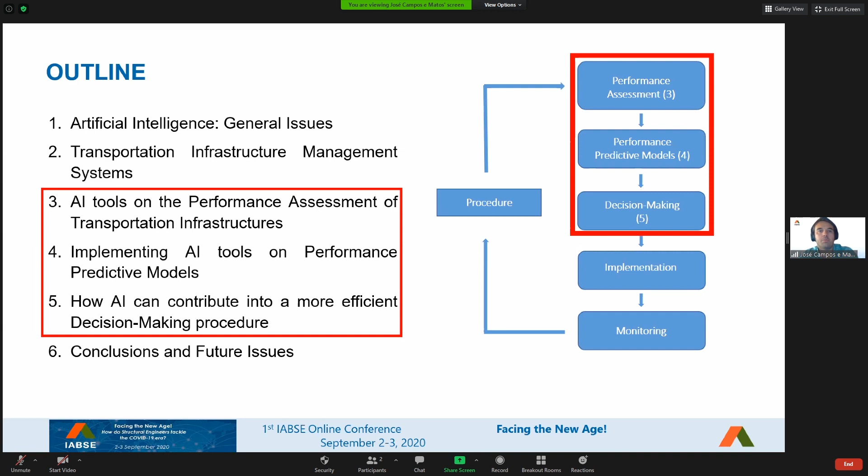And these stages cover the performance assessment, the performance predictive models, and the decision making, which are the main stages of any transportation management system, infrastructure management system. At the end, I'm going to speak about the main conclusions and future issues about this application of artificial intelligence tools on transportation infrastructure management systems.

So, what is artificial intelligence? Artificial intelligence is defined as the ability of a digital computer or a computer-controlled robot to perform tasks associated with intelligent beings. The term is often applied to the project of developing systems endowed with the intellectual processes characteristic of humans, such as the ability to reason, to discover meaning, generalize, or learn from past experience.

And what tools do we have for artificial intelligence? We can split the artificial intelligence tools into 6 main topics. The first one are tools used for search and optimization. The second one for logic issues. The third, probabilistic methods for uncertain reasoning, closely related with probability and the use of artificial intelligence to get a more accurate definition and less uncertainty.

The fourth, classifiers and statistical learning methods. The fifth, which is the most used one, is artificial neural networks. And the sixth is related with evaluating progress. And these are the tools that we have in our hands. I'm not applying all of them in transportation infrastructure management systems, but I'm giving you later on some applications of some of them in these infrastructure management systems.

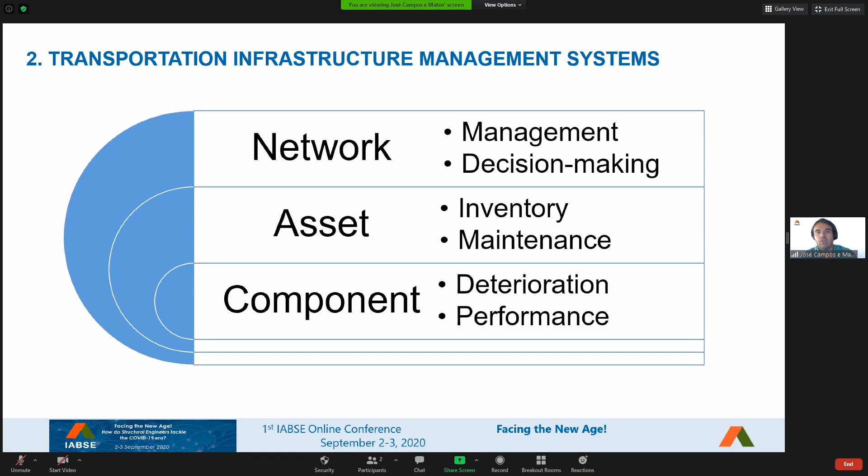Then we have the asset or the system, depending on the terminology. And here we do the maintenance typically at the system level and/or the asset level. And also the inventory is made at asset level. But the fact is that the decision making and the management itself is made at a network level. So there should be a high connection between the component, the asset and the network level for transportation management systems. And what we see nowadays is that most of our transportation management systems cover the component and the asset. They do not connect with the network level.

So going again, I spoke about this component, asset, and network. And what are the main stages of a management system, or what should be, because most of them do not have these stages. So this is what we should include in a management system. We should include the deterioration of the component.

And for that, we need to get data, and typically the management systems nowadays get this data. Most of them are condition-based management systems, so they only get visual inspection data on the condition of the component. But more recently, some are going deeper, and they get other kinds of data from NDTs, and they mix this data with condition and visual inspection data and so on. But this is the data about the deterioration of a component.

Then we need to calculate the performance, and we need to predict the performance. And not all management systems predict the performance, or have models for doing performance prediction. Most of them only focus on the database, on what I said before, on the deterioration level.

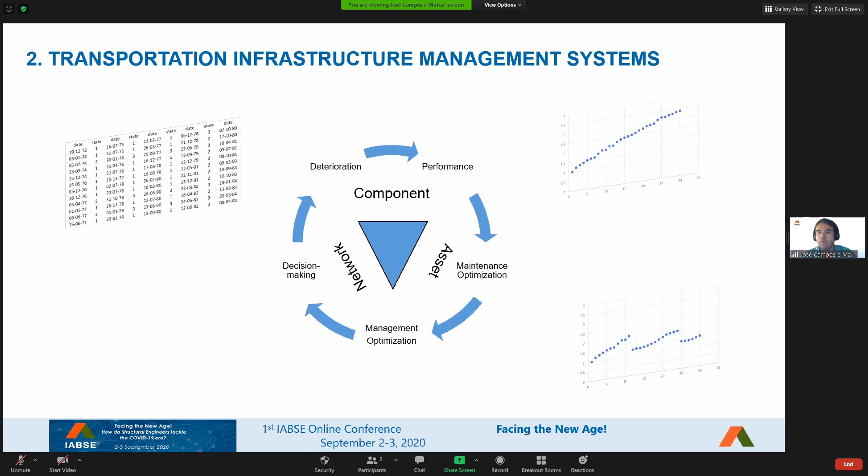After we predict, which is already good for those systems that already have some predictive models, we need to do optimization. We need to simulate different maintenance strategies, and then we need to implement an optimization algorithm to define what is the best strategy from those possible strategies that we have. So we do optimization, and at the end, we can do decision making.

I want to say here that the algorithm or the software does not replace humans. No one replaces humans. So the decision making should always be made at the end by humans. But what we want here is that future infrastructure management systems should support humans in their decision making process. And typically we start from a component, then we go to the asset, and then we finalize at the network level.

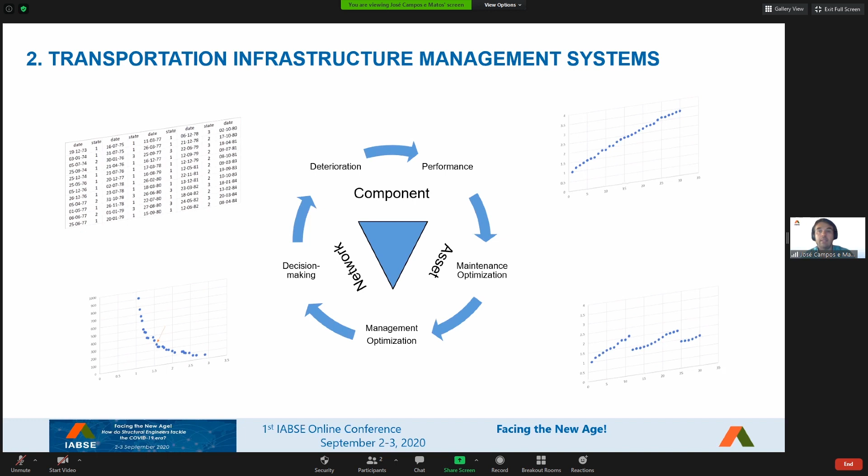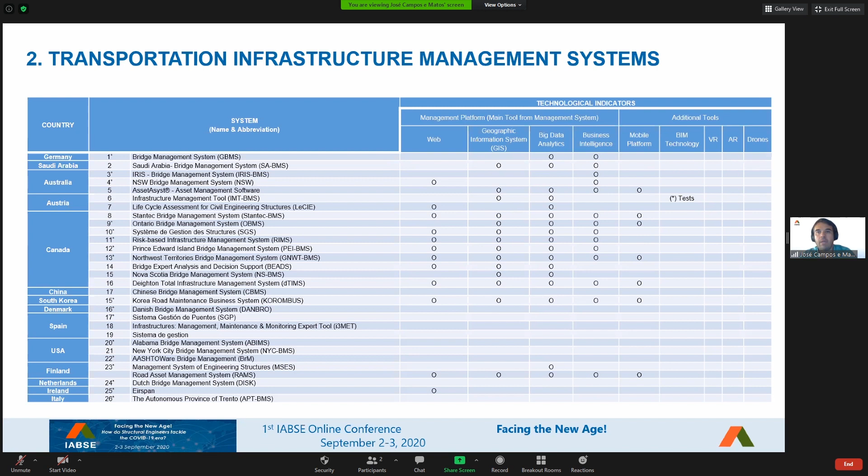So BIM, some are using, but only some. And virtual reality, augmented reality, almost none is using. And if we speak about drones, I know that we are applying drones also, but it's not completely connected with the management system itself. So this is the status of the other management systems, as you can see here.

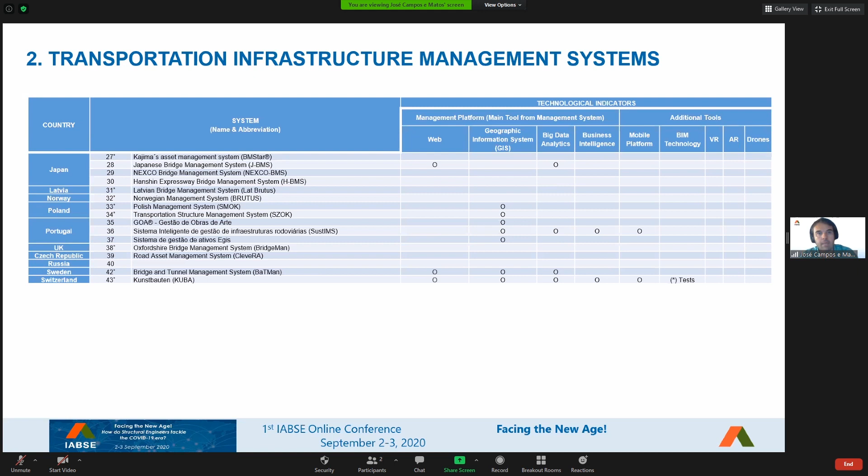And this is a very good comparison in terms of technological advancement of the management systems nowadays for transportation infrastructures. So at the end, what we can say is that there are already advancements in the management systems, but there is still a lot to do.

Now, as I told in the outline, I'm going to split my presentation in the 3 main stages of an infrastructure transportation management system. The first one is the application of AI tools on performance assessment of such transportation infrastructures. And when we assess, we can do it with visual inspection. We can use NDTs, or even we can use monitoring. So how the AI tools can be used in order to make a more efficient assessment.

And I'm going to provide you some examples from our research projects and from our developments that we have here at the University of Minho. And one of these examples is this bridge. This bridge was assessed through a reliability analysis. The reliability indicators are not often used. In some countries, they are using reliability analysis, but mostly it is only condition based, and at component level. So the reliability is made at the asset level.

So you can see here the model of the whole bridge, and it's an indicator that is not so easy to get, because you need to use numerical modeling to obtain such indicator. But it's a very important and more objective indicator than the condition one. And what we did here, we started to use Bayesian inference as an AI tool first to reduce the statistical uncertainty of our parameters, and then we combined another AI tool, an evolutionary algorithm, in order to identify the most relevant parameters of this bridge, and compare this with threshold values in order to check if the reliability that we are calculating at the end is or not within the threshold value.

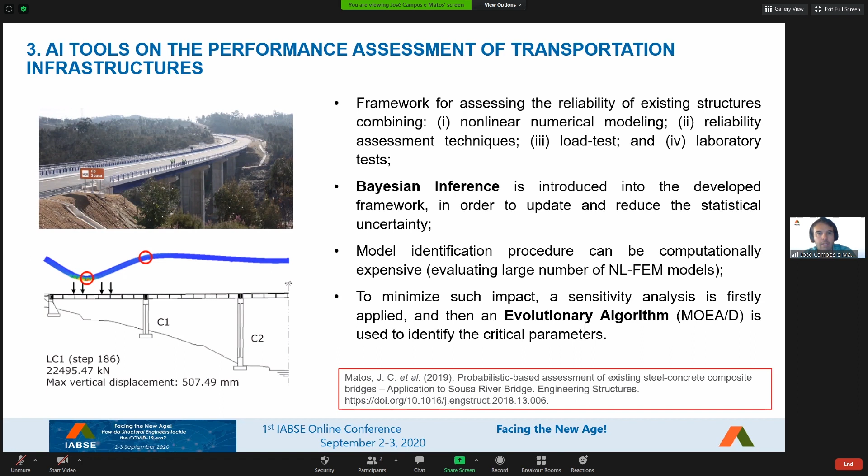So this is one simple application of an assessment of a bridge. It's not so simple, but it's an application where the AI tools were used to reduce uncertainty first, and then to calculate the reliability indicator of that bridge. So you have here the publication where all the study was provided, if you want to go and search a bit more about this application.

A second application, which is also quite interesting, is about the use of emulation models. In this case it was surrogate models, a Gaussian process response surface technique. And this is mainly because we have very complex systems and very complex structures. And when we do the assessment of bridges or any other kind of structure, typically the models that we have are very, very heavy. And one way to use AI tools to make these models lighter, and this way to do the analysis in a more efficient way, is to use surrogate models.

This is being used more often, and this is the case of an application to a masonry arch bridge, a whole bridge that was assessed. We determined also the reliability indicator of such bridge, and we did a probabilistic-based assessment of this bridge. And we used first very heavy models, and then we calculated the surrogate model to give a faster and more efficient response, and in this way to determine the reliability indicator again of this bridge.

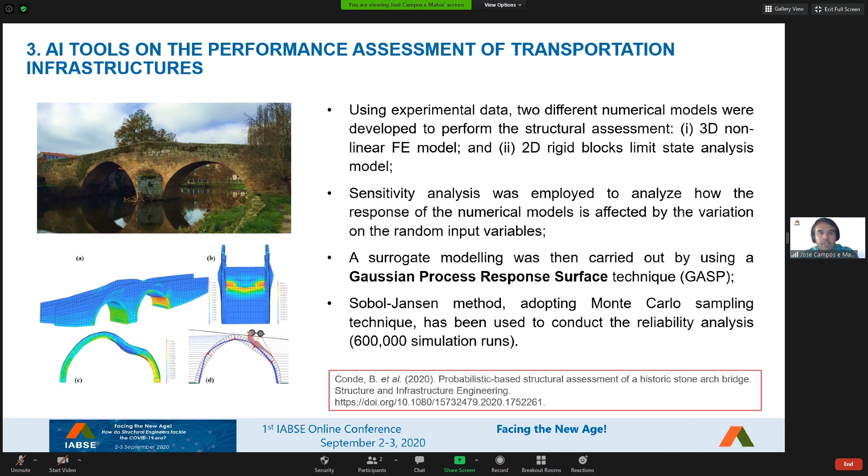Another application is with the classification system that was developed in this case for rock slopes, so in geotechnics, in embankments. And we applied artificial neural networks and support vector machines to support the classification and the routine inspection activities of our engineers. And we defined in our research group an earthwork hazard category.

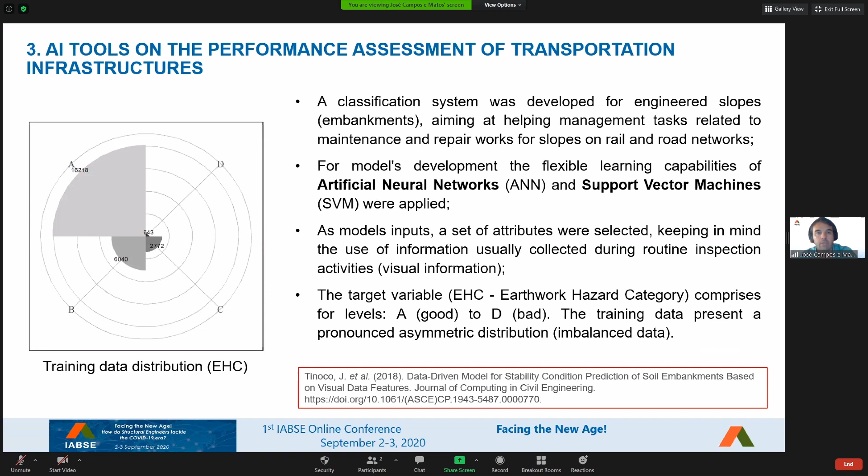So as you know, rock slopes are present a lot in transportation systems, railways or roads, and there was no classification here in Portugal for rock slopes, and we started with this classification, and then we did the training data. But the fact is that in the data that we had, most of these slopes were in a very good state. So you can see an unbalanced distribution of that data. And due to that reason, we were somehow obliged to use artificial intelligence tools to simulate the two possibilities and check how we fit the final data that we have, so that we could train and we could see what is the response.

For any kind of new slope that we have, we can use these tools in order to determine the prediction of this factor, the EHC factor. So we split the data set in two strategies, one for regression and one classification strategy. And then, because of the imbalance that we saw before, we have too many classifications as A in the data set. We use some approaches like no resampling, SMOTE, or oversampling.

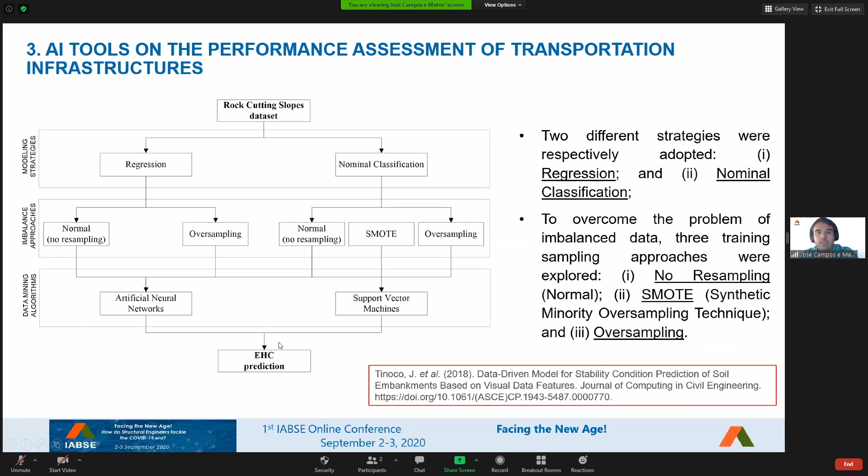And then we use artificial intelligence tools, in this case data mining, ANN, and support vector machines to do the prediction. These are some of the results that we got. As you can see here, the metrics that we use show that, especially for good shape slopes, which are the ones with more results because of the imbalance, we have more A and B. For these A and B we have very good results. But even for the others, we have very good results.

And if we use what we define as the best model for predicting the classification and assessment of our slopes, an artificial neural network model predicting the EHC classification factor from A, B, C, D, following a nominal classification strategy and applying an oversampling approach, the outcome gives us a very good distribution in terms of frequency compared with reality. So again, we could use AI tools on a large number of rock slopes, in roads or railways, to support us in the assessment and classification of such slopes.

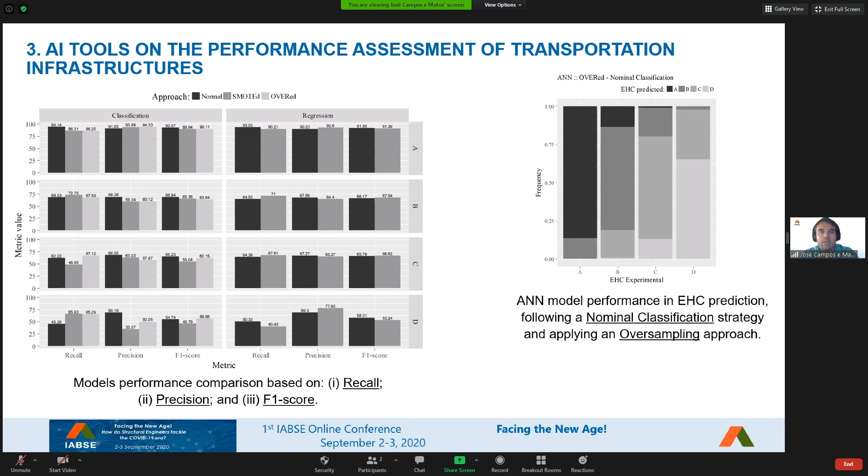Now I'm going to the second stage of a transportation infrastructure management system and how AI tools can be applied to develop and implement what we call performance predictive models. Performance predictive models are models that, based on the data sets that we have, we can use to predict and forecast. And here I give you an example of the application of performance predictive models with pavements.

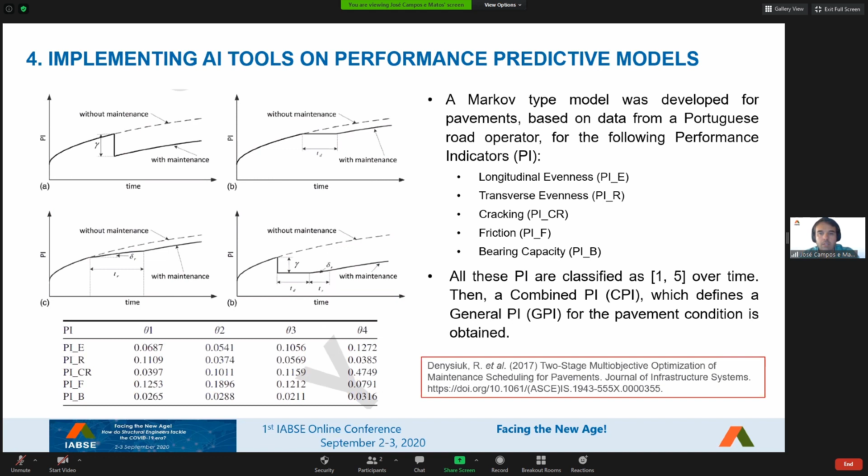In this case, we implement a Markov type model, with a Markov matrix that gives us the transition probabilities to develop the forecasting for these indicators, which are the main indicators for the pavements. And once we get these indicators classified from 1 to 5 over time, we make a combined performance indicator that gives us the condition of our pavements. You can see this study in this publication.

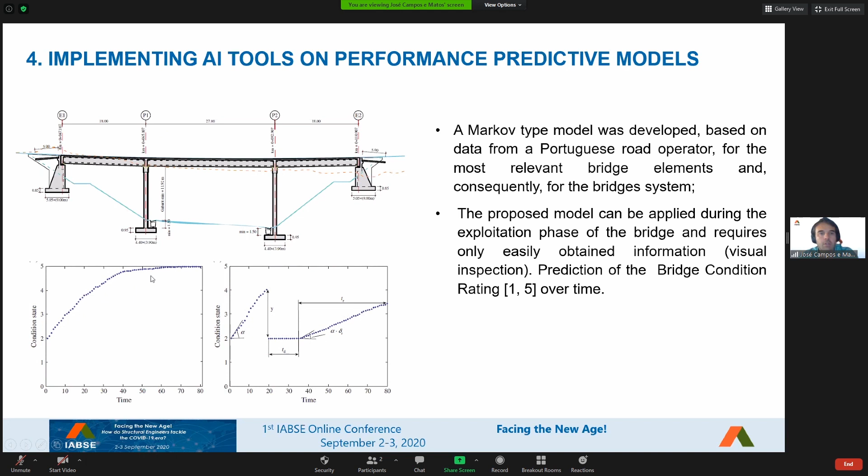The other one is a bridge that was also analyzed, and we developed a Markov type model of this bridge, which again gives us the forecasting and classification, in this case for different components of the bridge. This way it was possible to predict the evolution of the condition state of the bridge over time. And we could also simulate different maintenance or repair strategies on this same evolution curve. So this is the prediction model for the bridge, such as we have for the pavements. This is a publication in the journal of IABSE, so you can go there and see a deeper analysis.

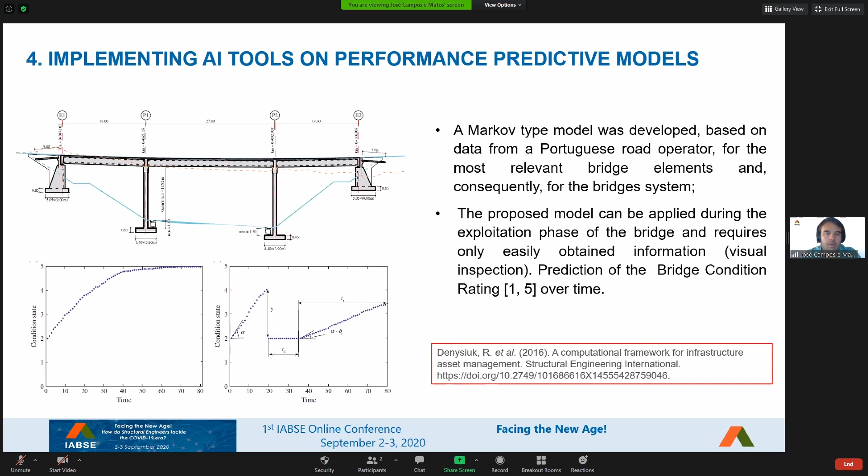But we did some more recent studies, and for bridges, in this case, we used a data set from the NBI, and we compared the Markov type models that we developed before with other kinds of models. As you can see here, we compare the Markov models with the semi and hidden Markov, but also with artificial neural networks, which is an artificial intelligence model. And the artificial neural network is the one that gives the most accuracy, because the ratio between the predicted and observed values is very close to 1. So AI tools may in the future replace the Markov models most widely used in transportation management systems.

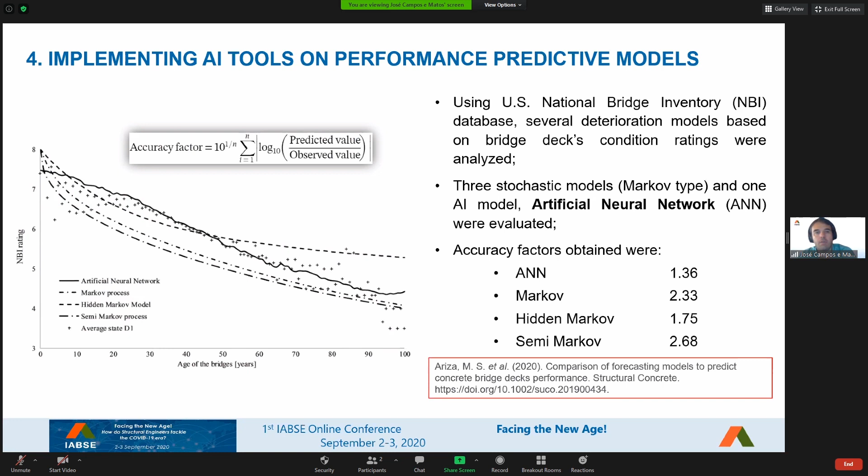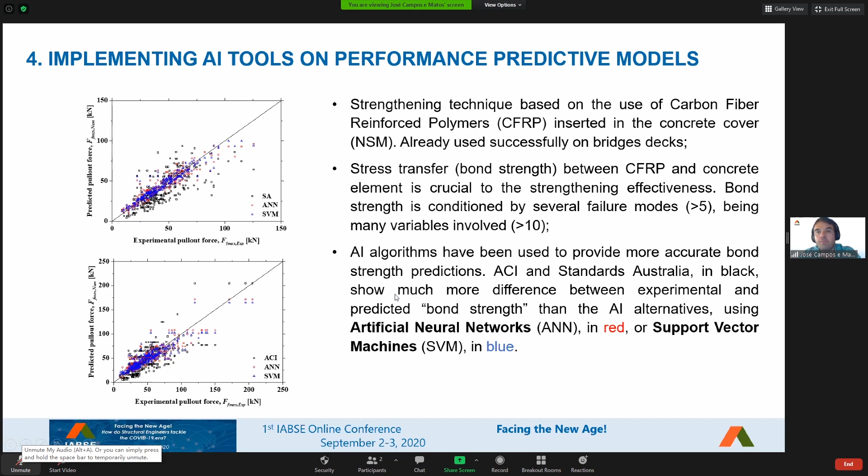So in fact, we should think of using more and more AI tools, such as artificial neural networks, to predict the evolution of the performance of our bridges. And the good thing is that ANN works not only with less data, but also with a lot of data. So we can train it; it's a dynamic process. So my conclusion from this study is that artificial intelligence could and should be a very good tool to implement in the future for the performance prediction of our assets in transportation infrastructure management systems. Here you also have an example of applying artificial intelligence tools to predict the behavior over time of the pull-out forces in strengthening and repairing concrete bridge decks.

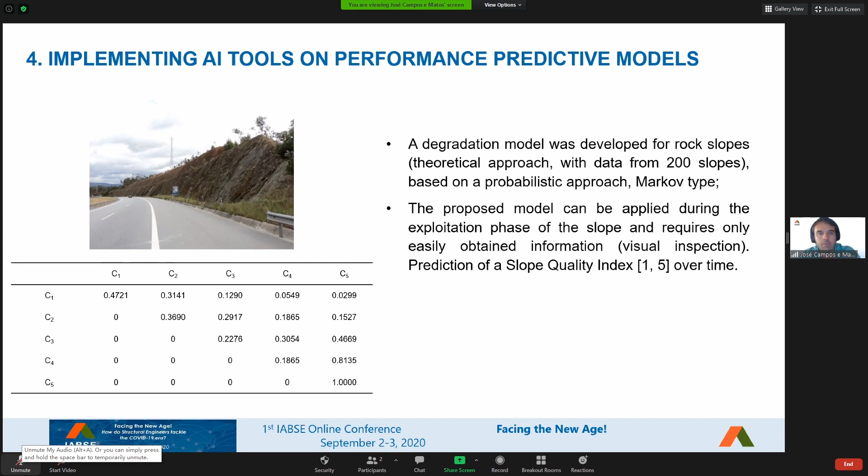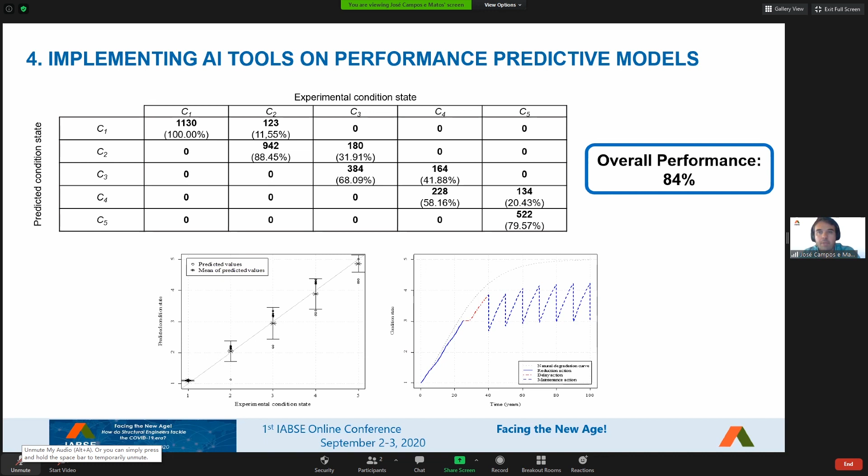And also here you can see an application of using Markov type models in order to predict the behavior of rock slopes with the time. So here is the accuracy, the performance of the model, and here is the prediction of our model. The accuracy is more than 80%, which is very good in this case, and I fully recommend.

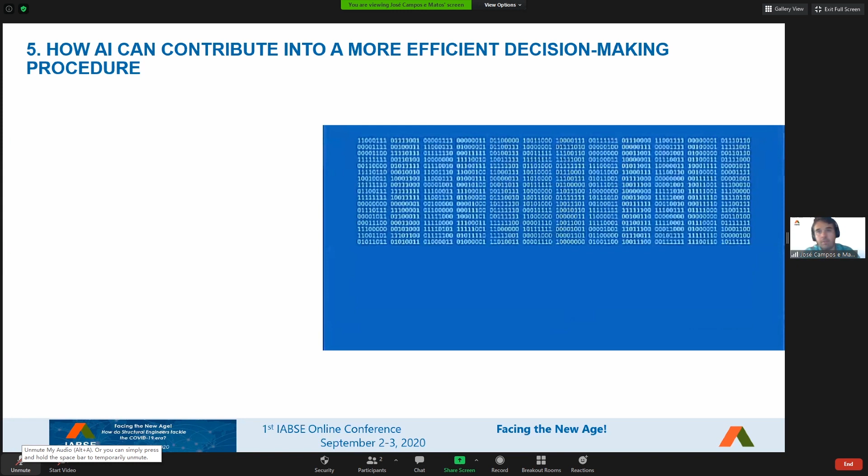The last part of my talk is concerning the application of AI tools in the decision-making procedure. So once we have the data set, once we have the prediction, then we need to do optimization, multi-criteria optimization. In this case, it is made for pavements. We developed a Pareto curve, and we use an evolutionary algorithm, a global optimization algorithm, which is an artificial intelligence tool to get the most reasonable set of solutions.

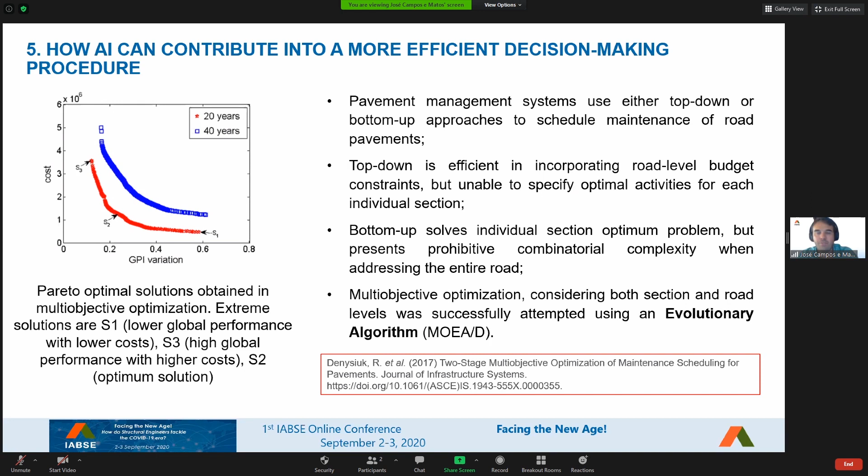And from this solution, then we can support the owners making their final decision about what is the best maintenance strategy. Any more information you can get in this publication, as well as all others. This is the same, but for concrete bridges with different strategies for 20 and 30 years. And we apply an artificial intelligence tool in this case for getting the best results.

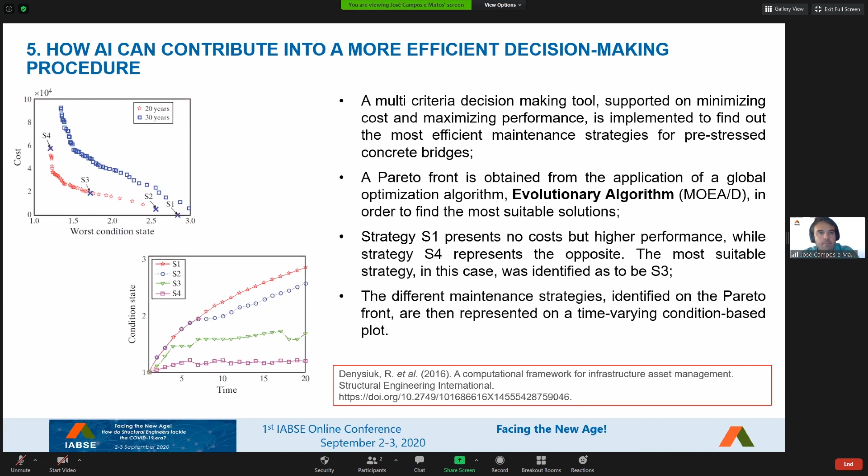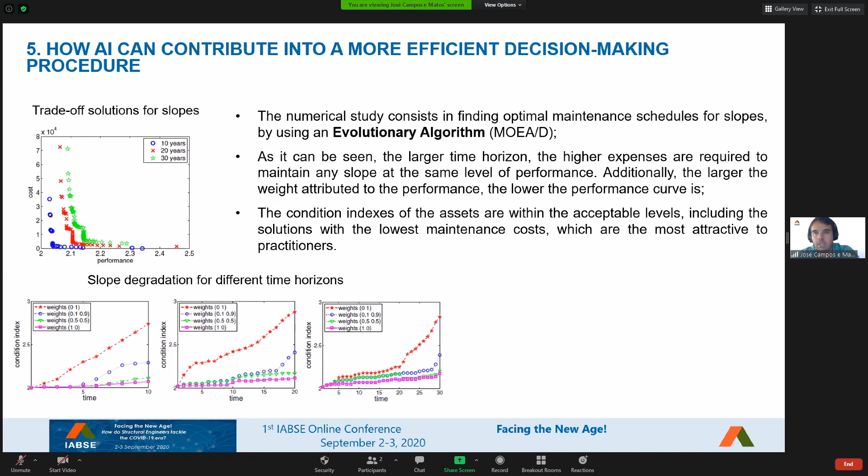And this is also an application of an artificial intelligence tool, evolutionary algorithm, to get the best trade-off solution, in this case for rock slopes. Now we are going to the conclusions, and since we are a bit out of time, I'm going to provide you the main conclusions and future issues.

And as the main conclusions, I must say that AI tools are already being used worldwide since some years in order to solve complex and computationally costly problems. We can split these tools in search and optimization, logic, probabilistic methods for uncertain reasoning, classifiers and statistical learning methods, ANN, and evaluating progress. Management systems are being applied worldwide in a more extensive and wide way on transportation infrastructures.

And some of these systems already incorporate new technologies and tools such as artificial intelligence. And transportation infrastructure management systems are divided in three main models: performance assessment, predictive, and decision making. And AI tools are being implemented in an efficient way, not to replace humans. This is something very important, but to make the decisions faster and reliable.

In line with this, some applications to different assets were provided. Of course, you have the papers. You can go more deep on each one, pavements, slopes, and bridges, and you can contact me if you have any doubt. And AI tools are used on search and optimization in these applications. So the evolutionary algorithm that I showed you before was used as an AI tool for search and optimization.